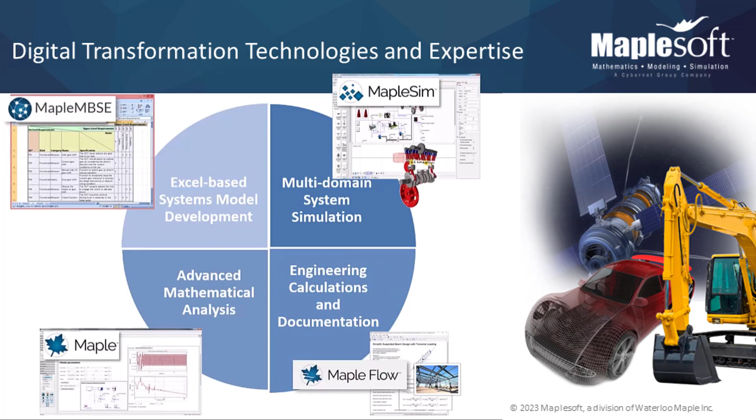MapleSoft has been developing engineering analysis and simulation tools for over 35 years. Its world-leading symbolic computation technologies provide the advanced analytical power used by thousands of engineers, scientists, and mathematicians for calculations, simulations, and advanced analysis throughout the world. We combine this technology with deep expertise in engineering design analysis and tool integration to help our customers succeed in their digital transformation initiatives.

These include developing tool and data connectivity technologies to improve engineering design collaboration, customization of our solutions to integrate with existing workflows and drive knowledge capture, as well as training and guidance to enhance the overall design process.

Maple is at the core of our offerings, providing the advanced symbolic capabilities to turn mathematical concepts and relationships into executable solutions quickly and robustly. Not only does this approach maximize productivity, it captures the knowledge behind the development of the solution, maintaining rigorous traceability back to the original principles. This makes it easier to track any changes and manage knowledge reuse reliably.

Once the solution is developed, Maple provides a powerful programming language for robust analysis tool development, along with many user interface components to build easy-to-use deployable tools. These tools can then be used by engineers without needing to know anything about Maple. The solutions can even be deployed as executable web pages or automatically generated programming code such as C, Java, Python, Visual Basic, and even Fortran.

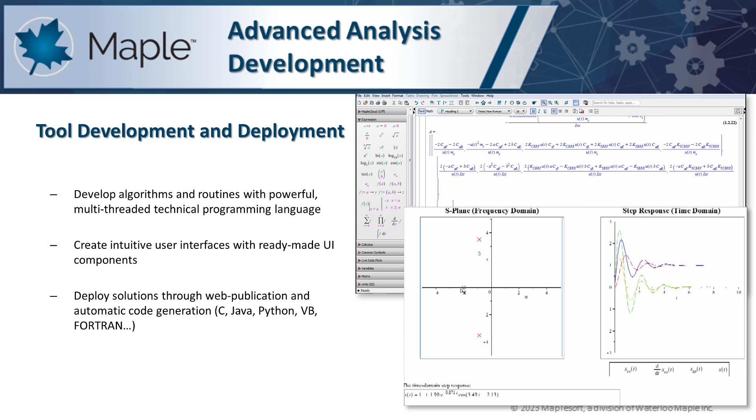And now we're bringing this analytical power to GENESYS. With a tight integration of Maple within the GENESYS environment, systems engineers can now perform analyses of their models without the need for script generation and execution in an external tool.

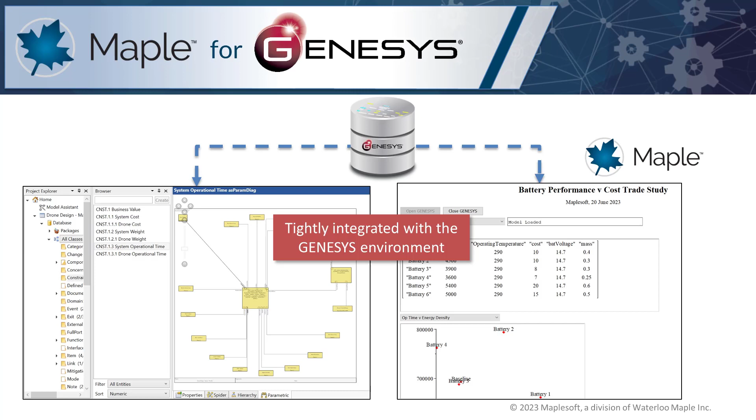Now, GENESYS users can leverage the power of the Maple environment by quickly accessing all constraints, relationship mappings, parameter values, and their engineering units, and combine them together to create analyses of the architectural model without moving out of the GENESYS environment.

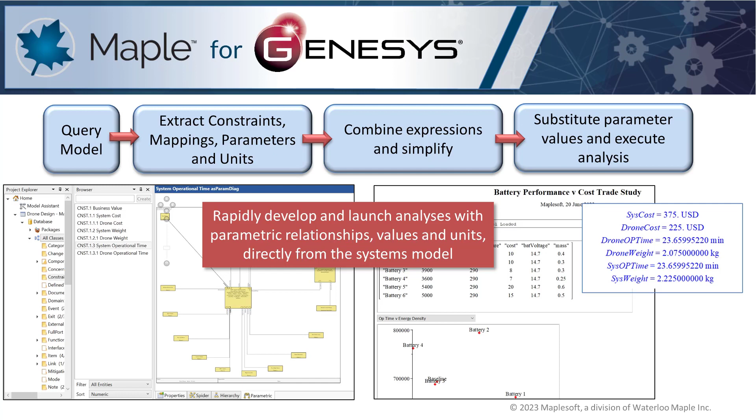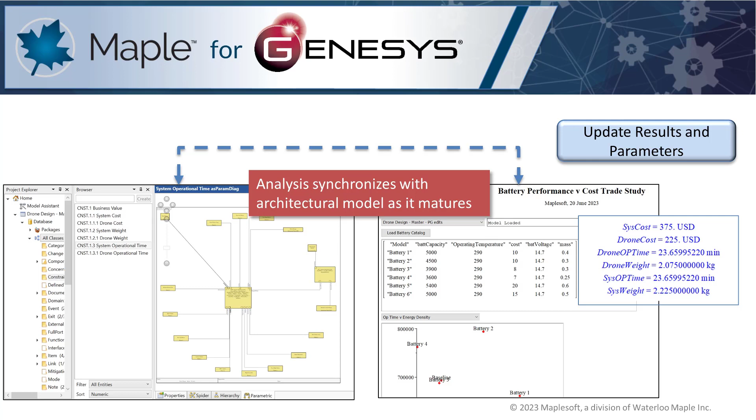This also means that as the architectural model matures and adjusts, the analysis will always synchronize with any changes made in the model, thus reducing the risk of errors creeping into the analysis that could be costly or even catastrophic later in the process. So why is Maple the best tool to complement the systems modeling capabilities of GENESYS?

Maple's powerful symbolic capability makes it a natural fit for extracting all mathematical relationships in the model. Constraints, equations, inequalities, and parameters can be easily transformed into executable assets for computation. Not only that, any missing or inconsistent information can be readily flagged, making it easier to trap and fix errors in the model.

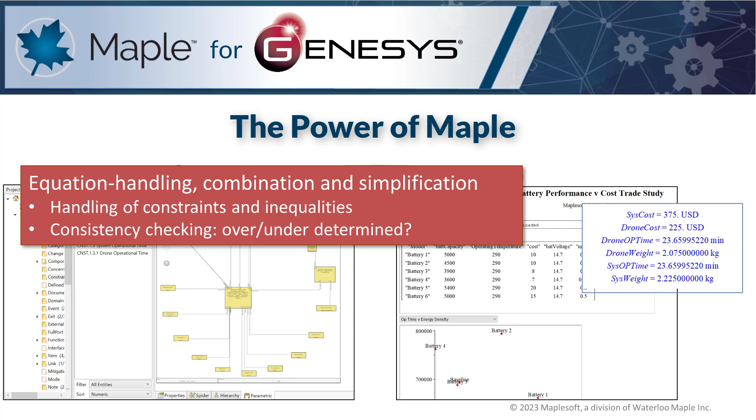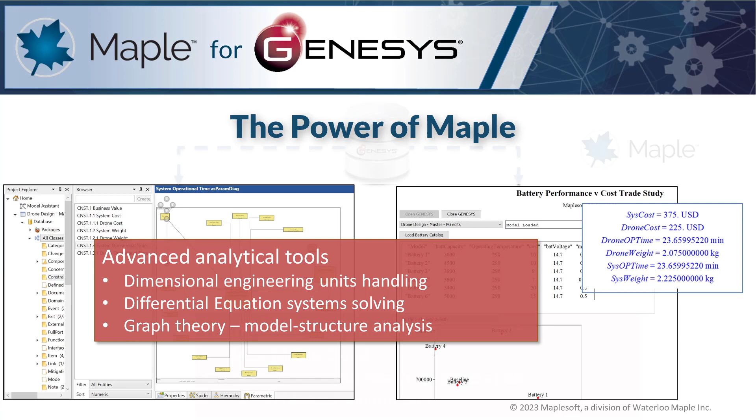Maple's extensive analytical capabilities mean that you'll always find the power you need to perform the most challenging analyses and even simulations, from simple roll-ups to solutions of systems of differential equations to graph-theoretic structural analysis. Maple can handle them all. And, once developed, solutions can be called from within GENESYS or deployed as executable web tools or programming code.

We'll complete this presentation with a short demonstration of the prototype integration that we've developed. Here you'll see the use of a GENESYS model to perform mass, energy, and cost rollups that are defined in the system model constraints. We'll then extend this to perform a simple trade study to improve the system's operating time. Then finish with an example of an embedded tool that performs the same trade study but without the need to know anything about the Maple language.

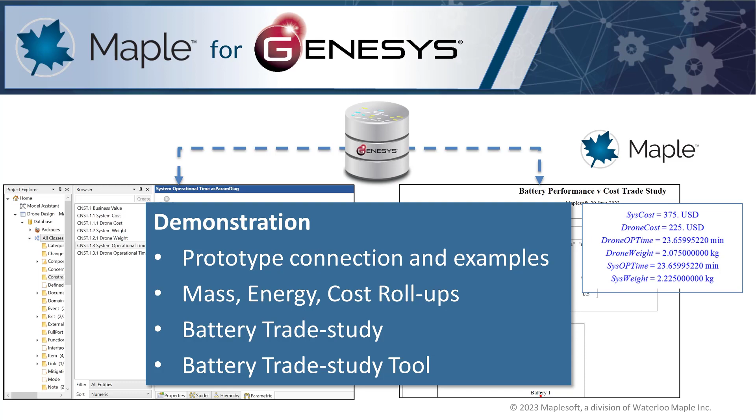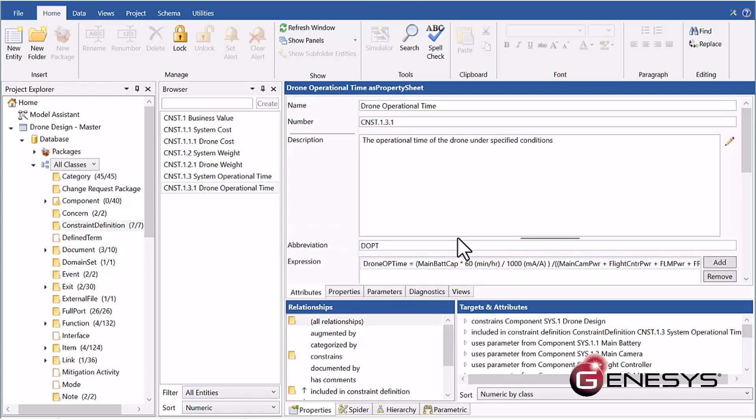For this demonstration, we're using the drone system model in GENESYS. We'll be extracting the constraint equations, such as the operating time, requiring total power draw of the system and battery capacity, and the system parameters such as the battery capacity, voltage, and mass.

In Maple, we've developed a proof of concept interface with GENESYS, with a set of user-level commands to drive the interface. In this prototype worksheet, we're showing the Maple commands we've developed to connect with GENESYS, select a model, and extract the constraints, parameters, and mappings needed to perform a mass, cost, and power roll-up.

However, with the example model, it turns out that there are some undefined variables, units, and functions. But we can perform the fixes in Maple and test them first. Once we know what the fixes are to produce a successful evaluation, we can go back to the model in GENESYS to implement those fixes.

In this example, we're using a version of the GENESYS model where those fixes have been done. We've also combined all the steps in the previous example into a single command to perform the roll-up evaluation. Now we see that the total operation time of the system is only 23 minutes.

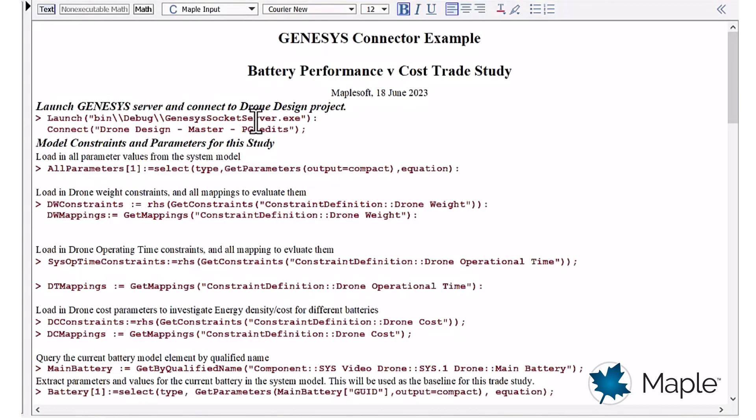Let's say we want to extend that time by using a higher capacity battery. In this example, we can perform a trade study comparing the current battery with others to select a new model that improves performance while complying with weight and cost constraints. Again, we load the constraints, mappings, and parameters.

This time we only need those that relate to operation time, drone weight, and system cost. Next, we set up the array of battery parameters we need to consider. First, the current battery in the system model, then the batteries we want to study.

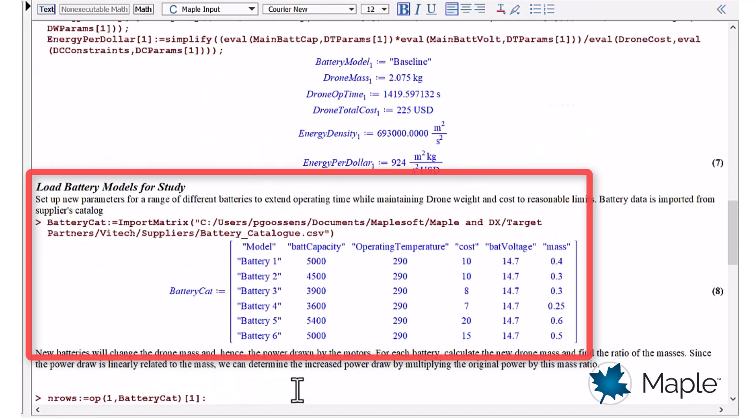Now we can perform the necessary analysis, including the effect of increased battery weight on the power draw from the motors. For this analysis, we want to consider operating time, total weight, cost, and energy density. From the resulting plots, we can make a selection.

For now, we'll select battery 5, purely on the basis of increased operation time. We can now update the system model with the new battery parameters.

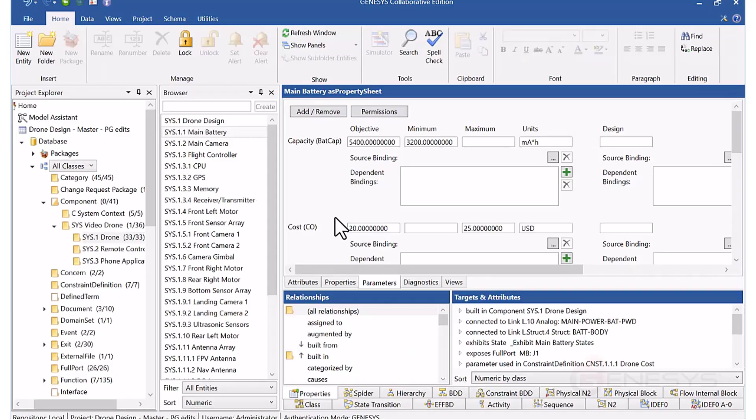In GENESYS, we see immediately that this exceeds the mass limit for the battery. So we'll need to make a decision on how important extending operation time is over weight limit. Or we select a different model.

Note that extracting the design limits from the model is possible, so this can be factored into the analysis in Maple. It just wasn't part of the scope of the proof of concept project.

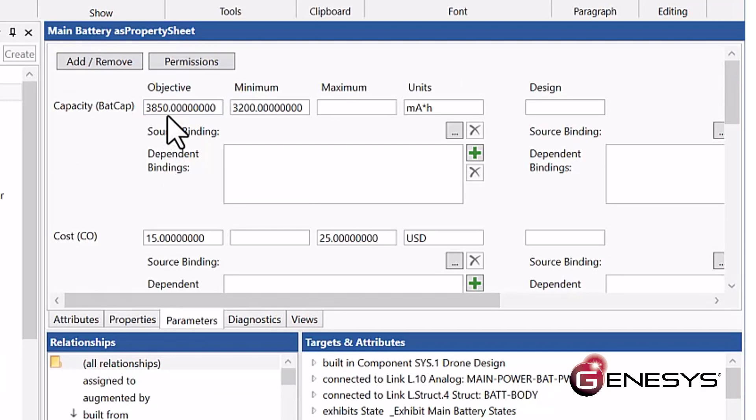Finally, we can package this analysis into something that can be readily used by the engineer without learning the Maple language. Maple provides a comprehensive set of UI components that allows users to build self-contained applications for specific tasks.

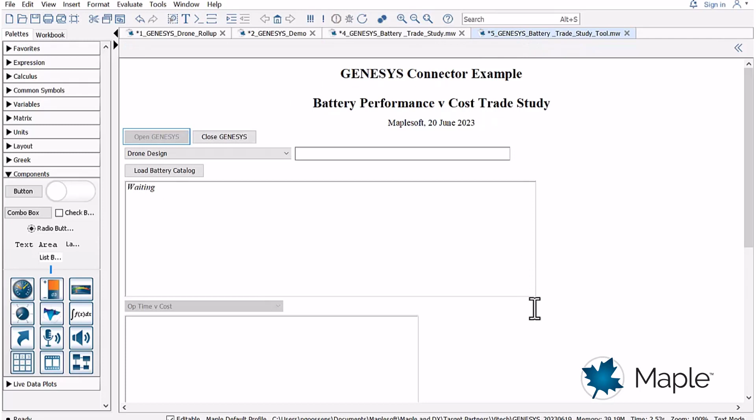Here we've created a very basic prototype of a tool. We can open GENESYS with a click of a button, select the model from a drop-down menu that's been populated from GENESYS. This loads the constraints, mappings, and parameters.

Now we can load the battery catalog and perform the analysis. The resulting plots can then be selected from a drop-down menu and studied. Here we see the battery 6 is a better candidate,

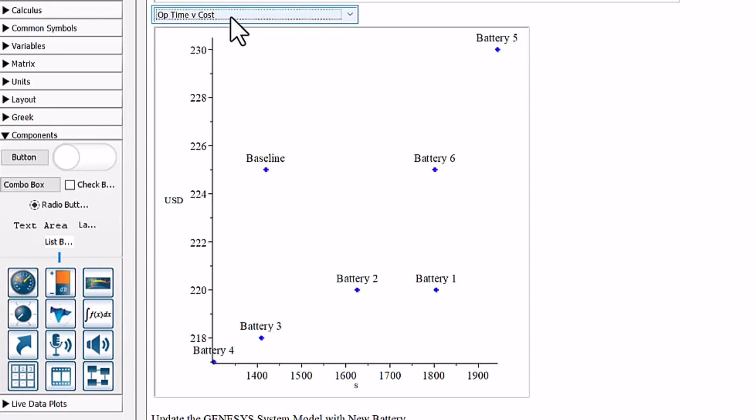so we can select it from the drop-down menu, and the new battery parameters are updated in the system model.

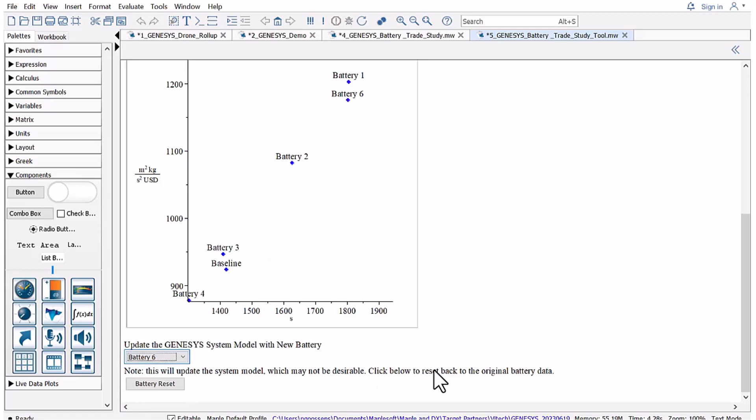This solution has been developed to work within the GENESYS ecosystem. By integrating the analysis with the GENESYS model, users have a simpler way of managing engineering data and passing it downstream, while ensuring traceability and reliability of the data.

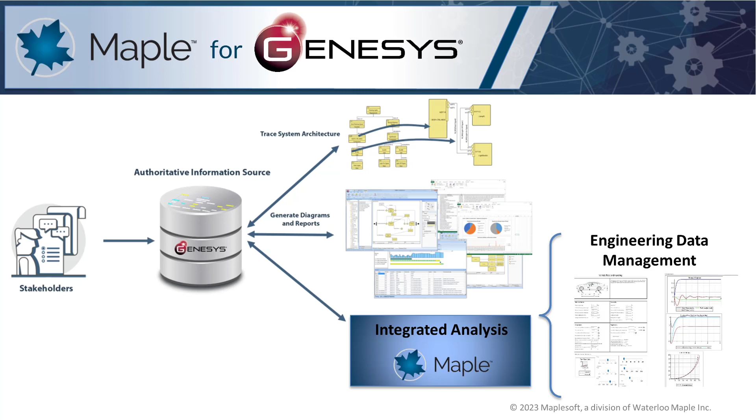The true value of this solution is that it creates efficient paths for the engineering knowledge that goes into the system design. This also greatly supports systems engineers by offering a simplified management of constraints, equations, and parameters, access to advanced analytical tools and solvers, and when the analysis is completed, they have multiple options to deploy the solutions.

In summary, Maple for GENESYS provides systems engineers with ready access to powerful and flexible analysis capabilities and allows effective management of engineering design data to reduce costs and help minimize time to market.